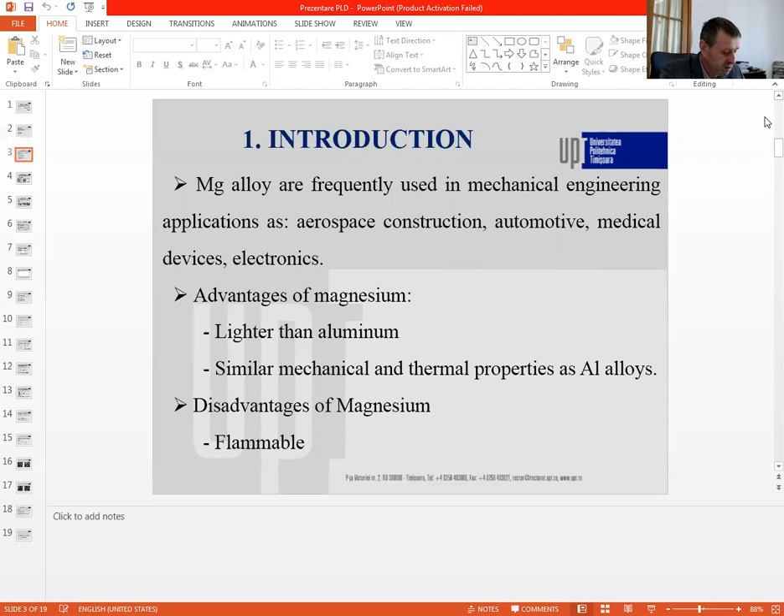Magnesium alloys are frequently used in mechanical engineering applications such as aerospace, construction, automotive, medical devices, electronics. These alloys are used because of their advantages: lighter than aluminum, similar mechanical and thermal properties as aluminum alloys. A major disadvantage of magnesium is that it is flammable. In automotive, magnesium alloys are used in applications such as transmission housings, engine blocks, steering wheel frames, and others.

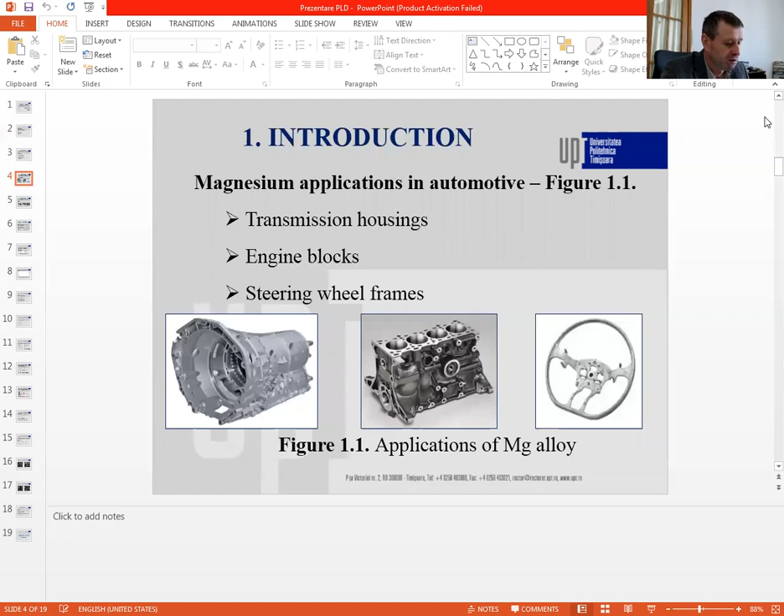Structural defects are the most difficult to identify because they are found inside the material and require special attention. The structure of magnesium alloy has a high density of casting defects that can occur as cracks, voids, spots, and others. They can be identified by non-destructive testing using X-ray equipment and penetrating liquids. This paper analyzed experimentally the effect of size on the fatigue duration of the magnesium alloy, considering the defects resulting from casting and the quality of the surface resulting from cutting.

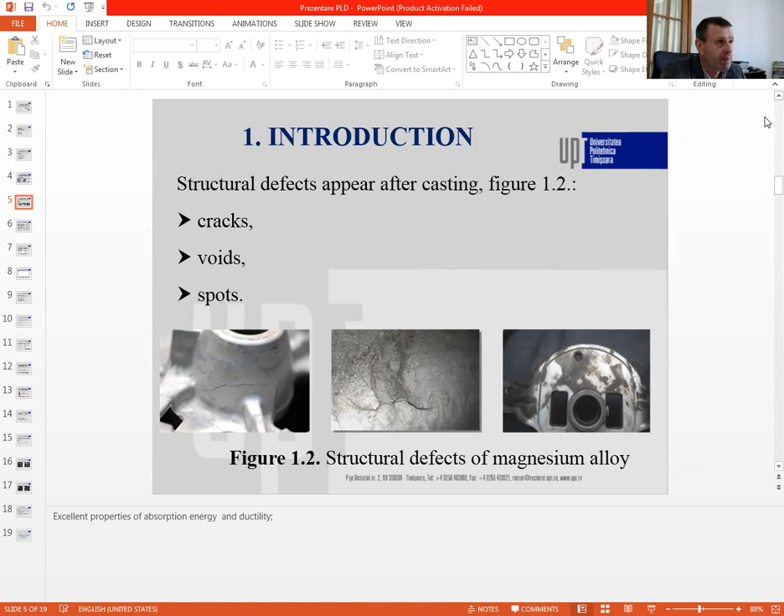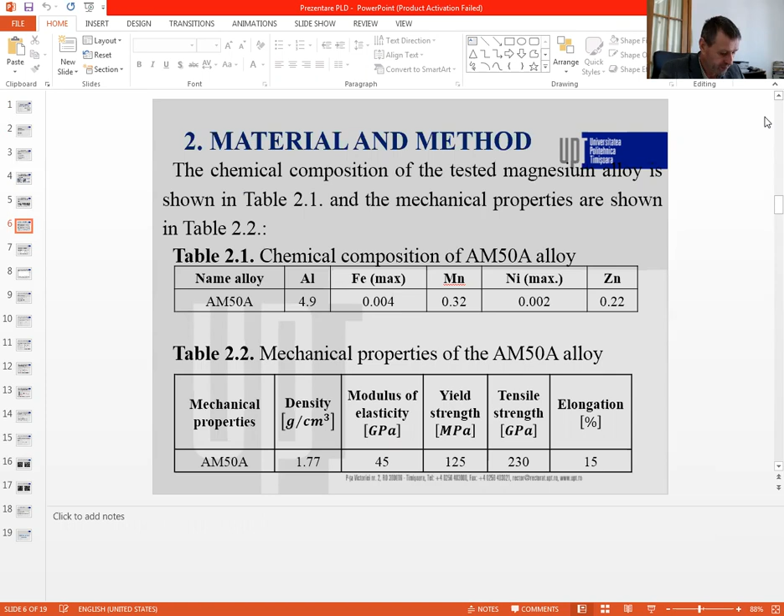The material analyzed in the paper was the magnesium alloy, having the chemical composition presented in table 2.1 and the mechanical properties in table 2.2. Fatigue tests were performed on the 100 kilonewton Walter Bai hydraulically operated machine. Two sets of circular specimens were tested, loaded in traction with a sinusoidal cycle having the degree of asymmetry of the cycle R equal 0.1 and the frequency f equal 5 Hz.

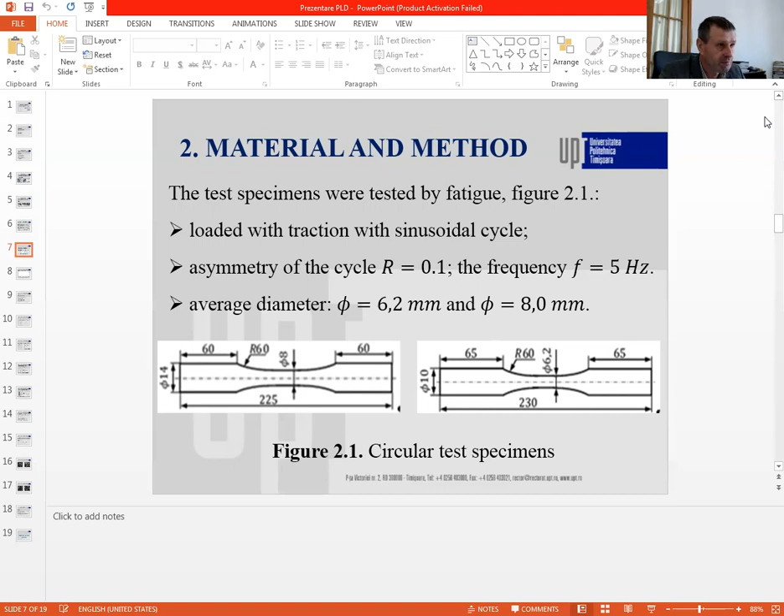The first set of tests consisted of specimens obtained by casting with an average diameter of 6.2 millimeters, and the second set of tests consisted of specimens obtained by casting and then processed by cutting with an average diameter of 8.0. A total of 7 specimens for each set were tested.

The test results are shown in figure 3.1, an SN fatigue curve corresponding to each set of samples tested, excluding specimens that were broken or showed major casting defects. The tests were performed under similar conditions for the two sets of samples. The results indicate a major effect of section size on finite fatigue durability. The analysis of the fatigue curves in figure 3.1 shows that the fatigue strength decreases as the diameter of the test piece increases. For this reason, the dimension effect is analyzed by correlating the two experimentally obtained fatigue curves.

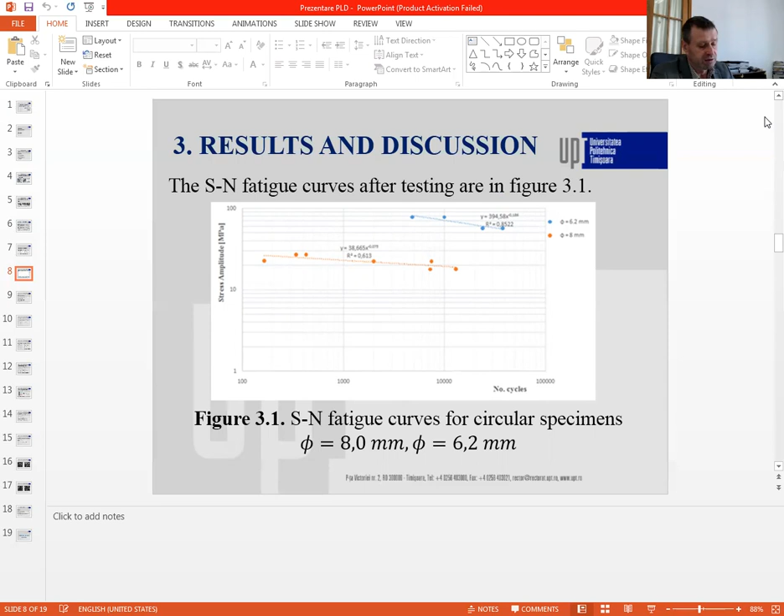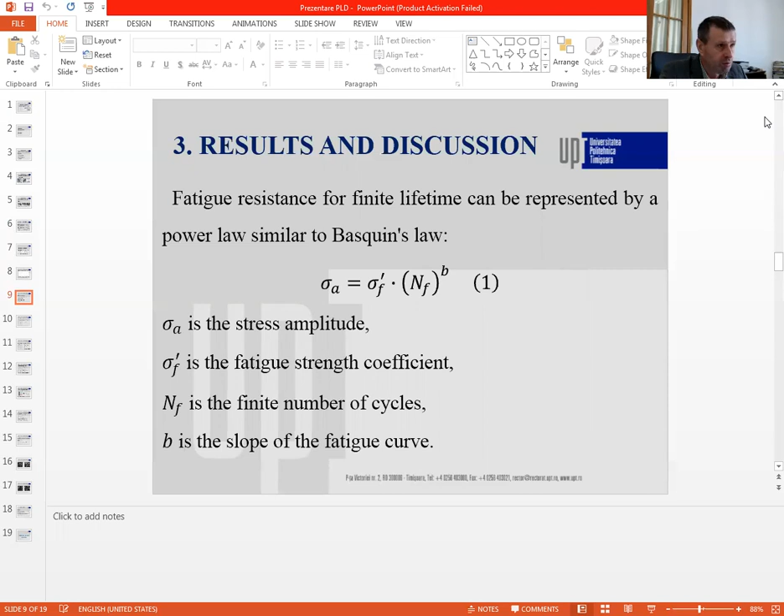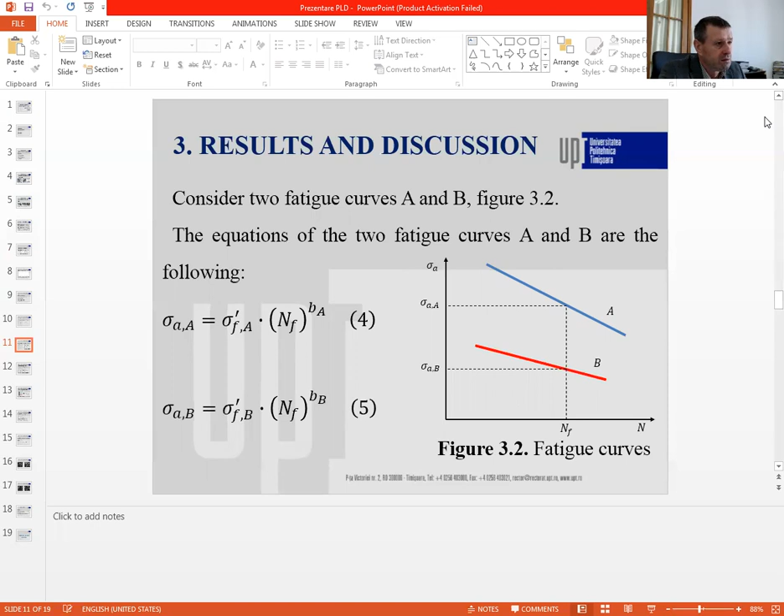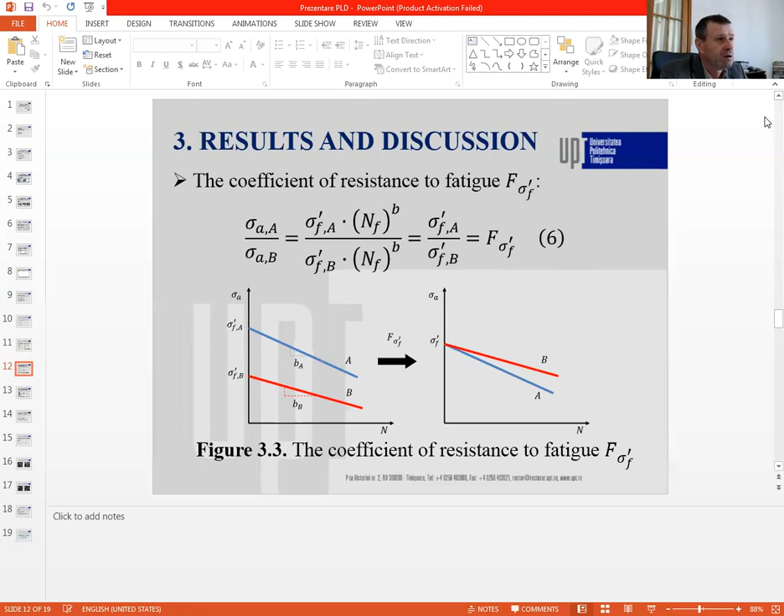Fatigue resistance for finite lifetime can be represented by a power law similar to Basquin law. See equation 1. In this case, for the two sets of sample tests, the equations of the fatigue curves are expressed by the given relations 2 and 3. For correlation, we consider two fatigue curves characterized by their equations 4 and 5. The correlation is defined by two factors. Correlation of the fatigue curves so that they have the same coefficient of fatigue, equation 6. Correlation of the fatigue curves so that they have the same slope, FB, equation 7.

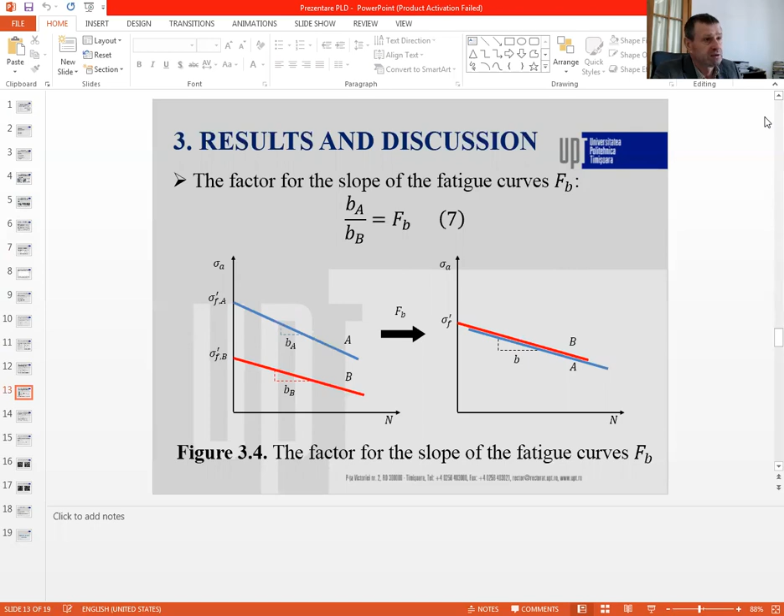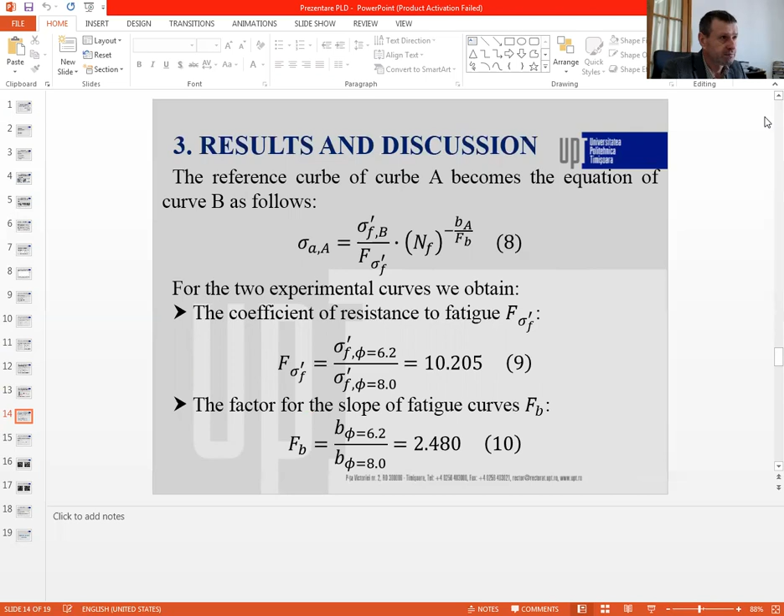Knowing the correlation coefficient, a master curve can be obtained that includes the dimensional effect and whose equation is equation 8. Analyzing the experimental results, we obtained the correlation factor of the fatigue resistance coefficient and respectively the correlation factor for the slope of the fatigue curves. The coefficient of resistance to fatigue is equation 9, 10.205, and the factor of the slope of fatigue curves, FB, equation 10, 2.480. If the fatigue curve for the specimen diameter 6.2 is considered as the reference curve, then the fatigue curve equation for the specimen set with the diameter 8.0 is obtained, equation 11.

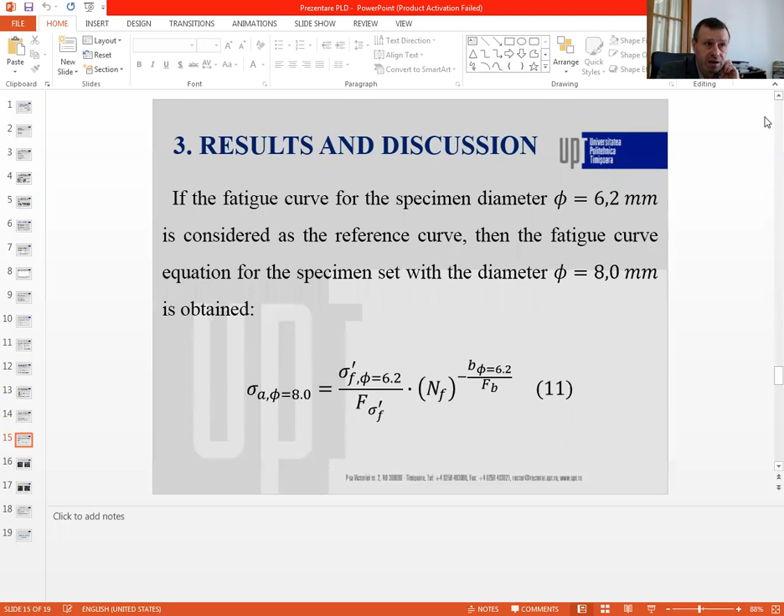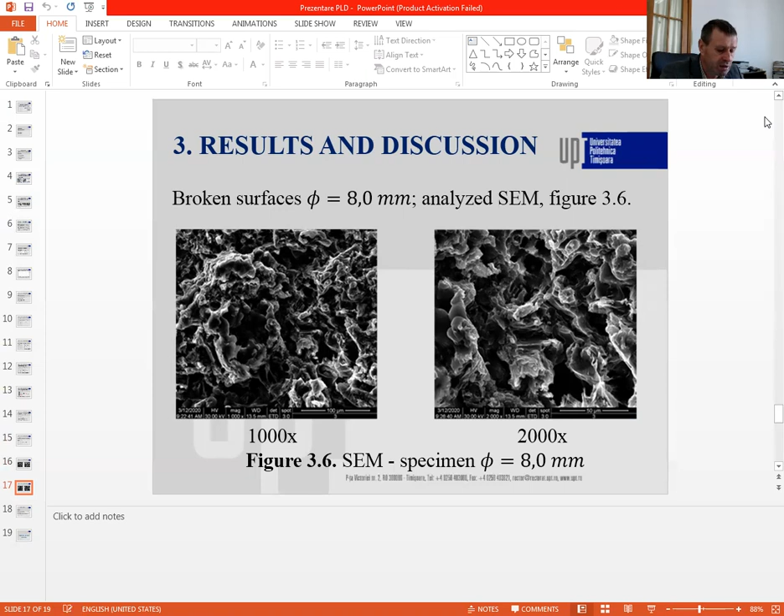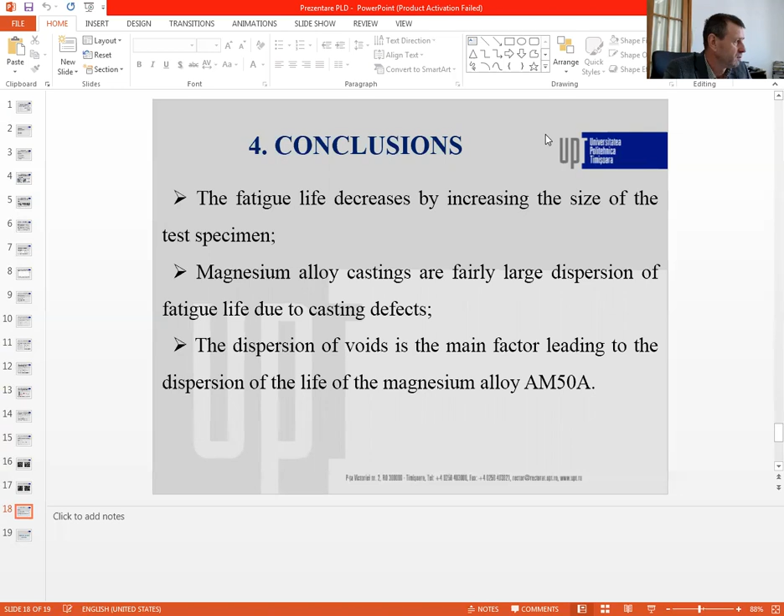Conclusion: the fatigue life decreases by increasing the size of the test specimen. Magnesium alloy castings have a fairly large dispersion of fatigue life due to casting defects. The dispersion of voids is the main factor leading to the dispersion of the life of magnesium alloy AM50A. Thank you for your attention.